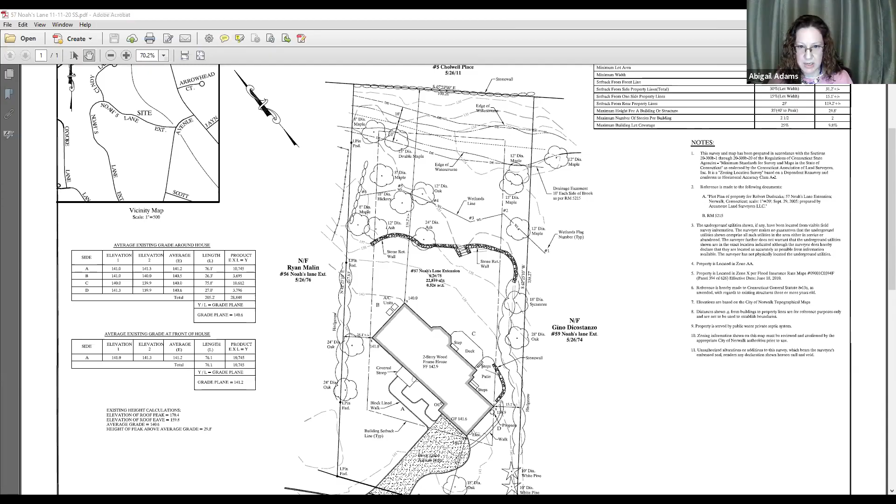I'm going to stop sharing for a second and pull up the design plans. Did that pop up for everybody? Okay, great. So I just want to quickly start with the demolition plan.

There's an existing walkway here, a small retaining wall, a patio, and an existing deck. Along with the existing retaining wall, we're looking to remove these items to make way for the new improvements we will be proposing. Let's go to the next sheet — here's the site plan of the improvements.

What we're looking to do is construct a new walkway around the side of the house to a new patio and outdoor kitchen area behind the garage, with a couple of steps down from the house and the garage itself. Then on this level, coming out from the kitchen, two steps down, one to a landing, and then another step down to a raised masonry patio that would have a seat wall surrounding it, and then a couple of steps down to a lower patio with a fire pit.

And this patio would be on level with the lawn. As you can see, we're looking to expand the lawn. In order to do so, instead of a hard masonry wall which might have large footings, we'd like to do some minor excavation in this area and install a large boulder wall.

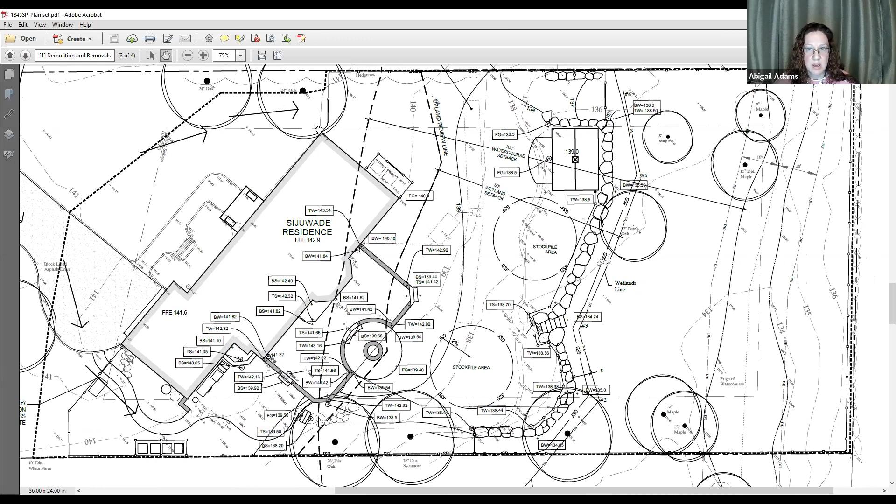And then wanted to move on to the wetland enhancement. As part of this development, we'd really like to significantly enhance the wetlands. In doing so, we'd be looking to remove some of the invasives and then do a planted buffer between the boulder slope and the wetland edge.

And then between the stepping stone path and the brook itself, we'd like to heavily plant that with natives. We're looking at northern bayberry, blueberry bushes, sedges, blue flag iris, cinnamon fern, shadblow, and eastern redbud.

So we're really trying to do a very diverse mix of plant material that's going to create an enhanced habitat and food source for wildlife, as well as four-season interest for the homeowners, and keep any of those invasives from coming back in. We'd really like to get those out and enhance this piece of property as part of the overall development.

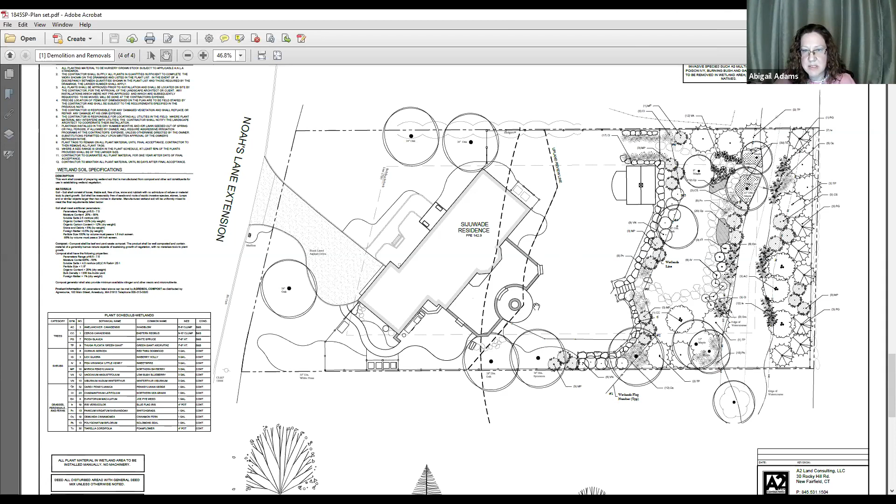One thing I did forget to mention—as part of the development we're looking to install a new septic system. Let me go back to the grading plan. The existing septic system and tanks are in this general area, and that doesn't work with any concept we were coming up with to get a patio that wasn't just sitting right behind their garage. We really wanted to utilize the back of the house and the kitchen, exiting there with a view of the whole property.

So we are proposing a new septic system, which has been designed by Palladino and Sons, and I believe they've submitted it to the health department for approval.

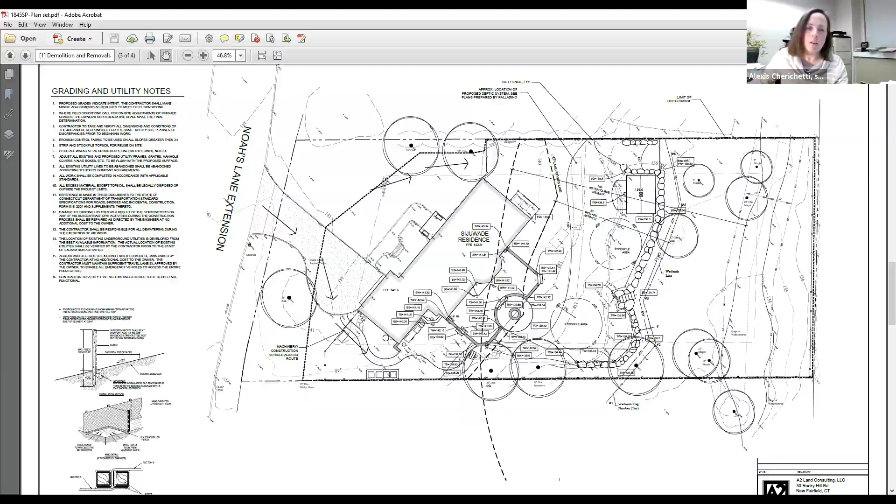Commissioners, questions? I have a question. I'd like to know if you can describe the fence again. You said a fence gets constructed around the entire perimeter of the property.

I'm confused. Yes, I shouldn't have said the entire perimeter. We'd be coming off the two front corners of the house, then the side yards, and then around the back of the property to enclose it. Would the fencing cross the brook? Yes, I'm proposing to raise the bottom elevation of that fence by about a foot or so to allow the flow.

Describe the fence again. What kind of fence is it? A board fence, 7 foot high. So like a stockade fence? Stockade, yep. Okay, thank you.

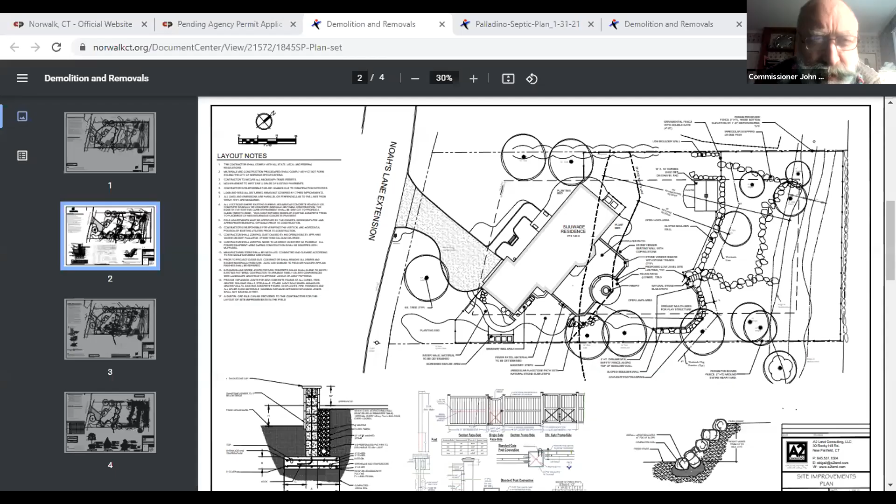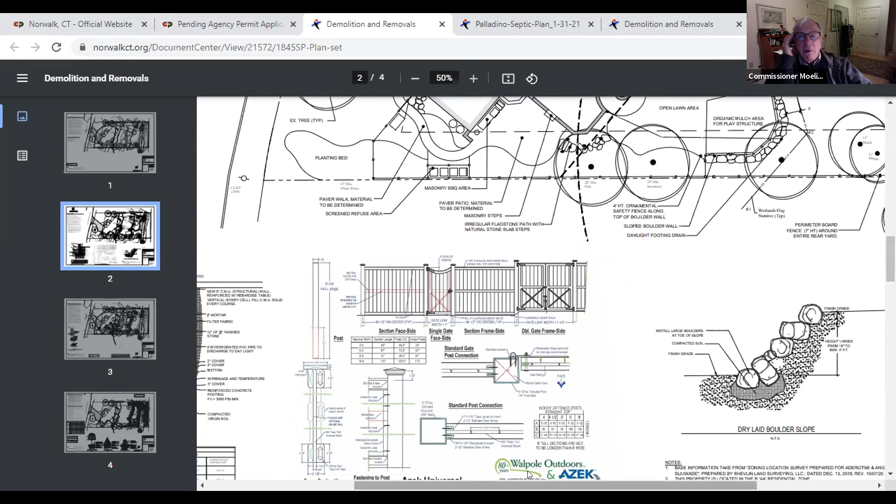So John, on sheet 3 or 2... 4, there's a detail of the fence, can you see that? Yes. And to the left are the footings that would be installed in the wetlands for the fence, is that correct, on the left-hand side? No, that's not for the fence, that's for the seat wall for the patio.

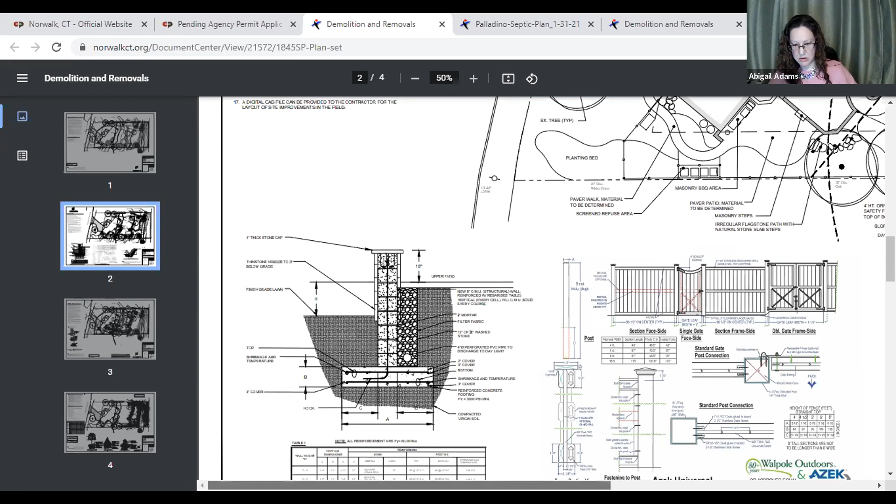The fence posts would just be dug deep, no cement, hand dug, set about 3.5 feet down into the ground. In concrete? No. And the fence is shown with the line dot markings around the perimeter. Thank you.

Abigail, in your presentation you mentioned a proposed application. This is an actual application, is it not? Yeah, that's just misuse of the term, our proposed development as part of this application. Okay, got it.

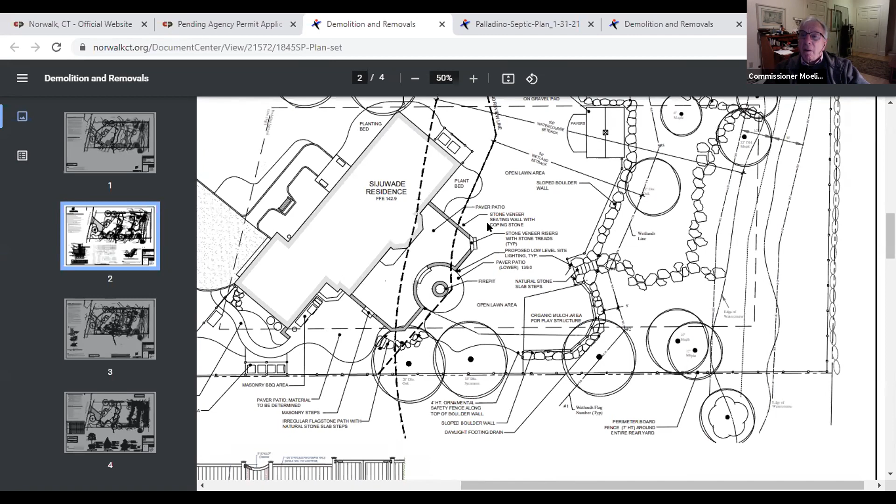I for one would be interested in seeing the current condition of the wetlands, so it would be easier to see the effect of the changes, enhancements and plantings. That might be accomplished by simple photography, I don't know, but I'm uncomfortable enhancing something when I don't know what condition it's in, especially with a running creek. I'd like to know if the level of that wetlands or creek rises regularly. I'd like a clearer understanding of what's there. I'm less concerned with the positioning of the septic tank and that sort of thing.

Okay, yeah, it's tough with the snow cover currently, it's a little hard to see at the moment. I can share some aerial photos real quickly if you like. I have copies, or at least one copy, of what was called Figure 1.

Can you describe that wetlands, Alexis? Have you seen it before it got snow covered? I have not seen it since the application was submitted. I went out there a long time ago, either in 2013 or 2015, when the current owners were considering the purchase, if I remember right. So unfortunately I don't have a good feel for the current condition of the wetland. It's not much higher in elevation than the watercourse.

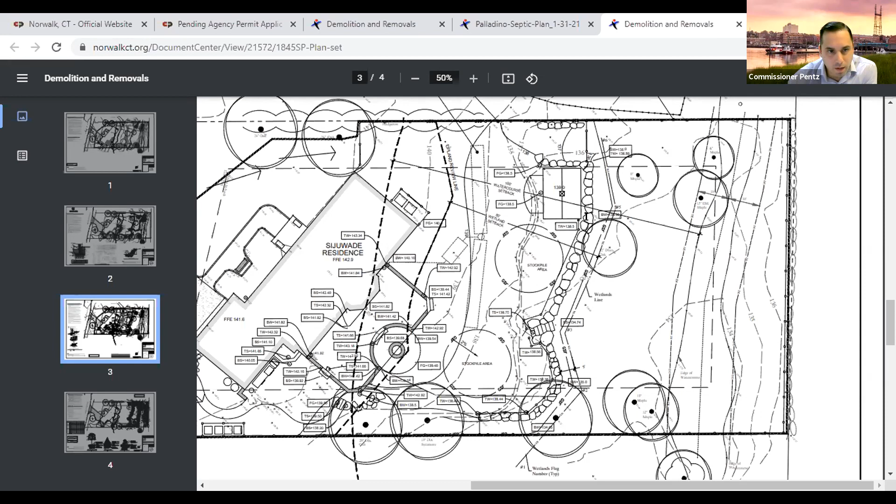The minimum distance is 5 feet from the wetland edge to the toe of the boulder wall, and then it would move back, so the excavation would be happening from the upland area. We do some excavation, just a little bit, because we'd set the boulders and then we'd be backfilling against it. So there's actually minimal excavation work that would need to happen either.

We'd set very large boulders to hold that slope back, so we don't need to have a large footing or any concrete poured in that area. The truck would come, it would set the boulders down and move along in a line and then back away from it and backfill. So there would be no disturbance within that wetland.

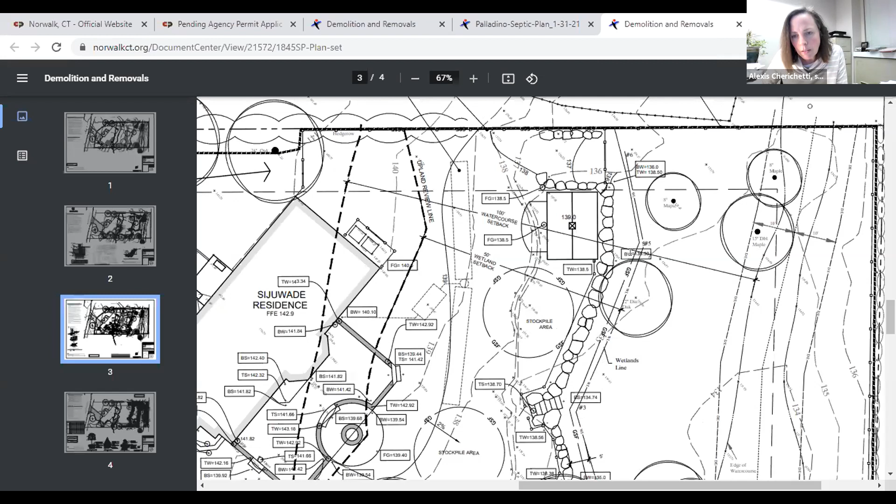So right now your silt fence line, the limit of disturbance, runs pretty much parallel to the wetland line, right? So this is the wetland line, and then what's labeled GSF is your silt fence line? Correct, which could be shifted away from the wetlands if need be.

Can I ask a question? How much fill is going to be brought in? Yeah, good question. We've calculated approximately 125 cubic yards.

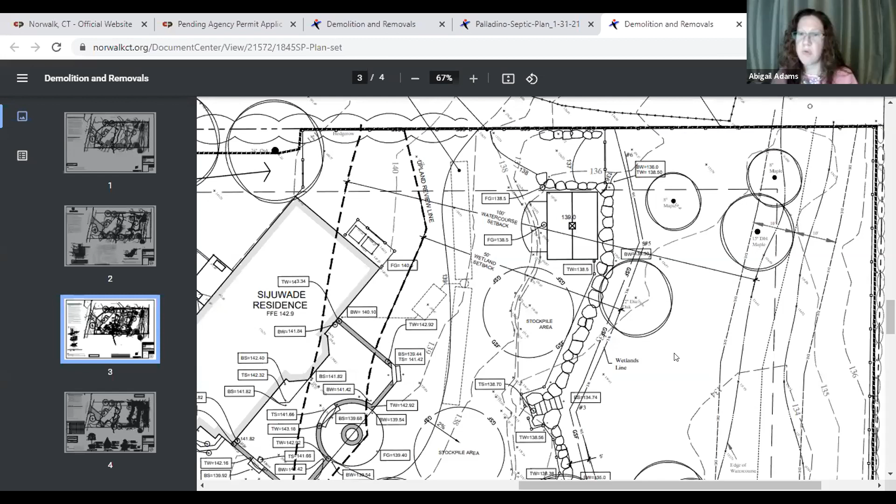That includes the fill related to the septic system as well? Correct, that's everything related to that expansion and for the septic system.

Is this a gate? Yes, that would be the rail, again, the railing style fence would come across there into the boulder slope down at the lower level so that there could be maintenance. I mean, there are some ashes in that wetlands area, but if there ever needed to be any kind of maintenance, we would want to have a gate back there.

I don't anticipate it being used very often, but again, the railing and that gate, it's a safety issue. So we have the railing across the top of the boulder slope. It would dead end into the shed, and then it would pick up again just where you had shown it at the base of that boulder slope and come across and meet up with the 7-foot board fence.

The top portion of this schematic is north, am I correct? Yes. Okay, the length of the fence that is anticipated to run across the wetlands from the midpoint to the edge of the property would be how long roughly?

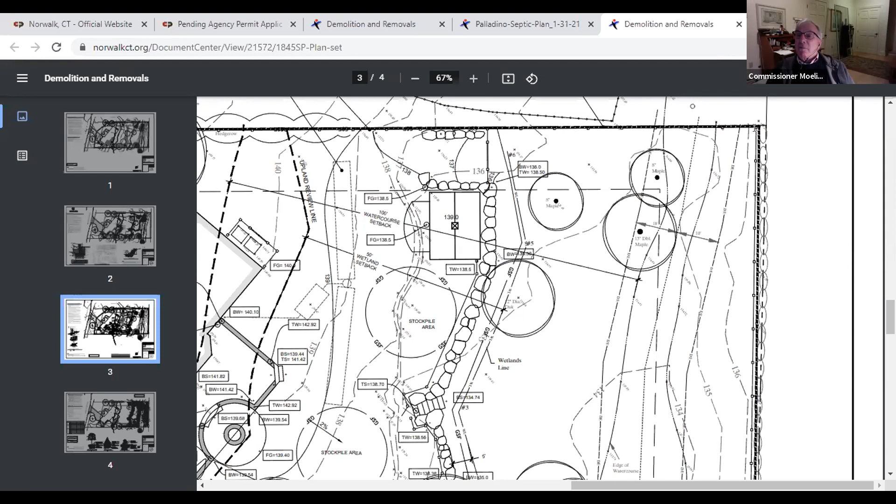Would there be one every 8 feet, or every 6, or 10? We'd probably do every 6 with the height. So you do every 6 feet for 60 feet, so it'd be 10 uprights running through the wetlands area.

On that northern part of the property, on that one side? Right, and then we have the southern side as well, which is about 75 feet.

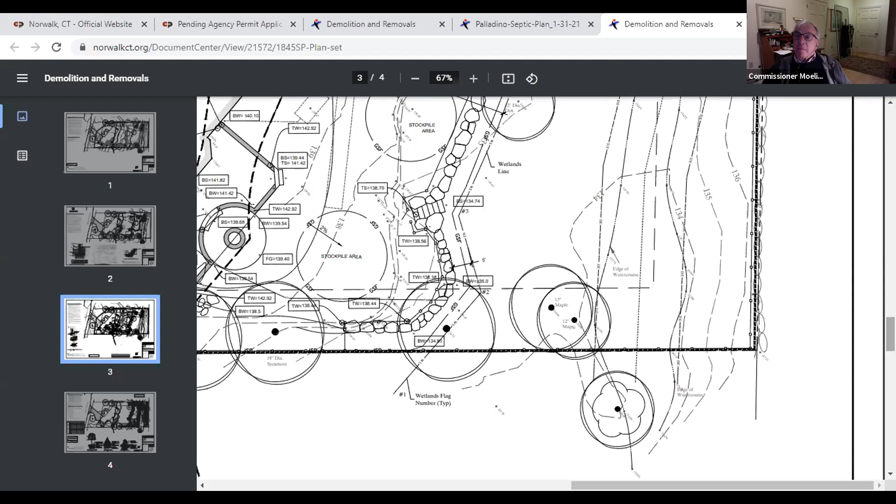That's a lot of disruption. On the east side, it's obscured by the thumbnails of our faces on the right-hand side. Let me get rid of those. That's 100 linear feet, just so we're clear, because that's the back.

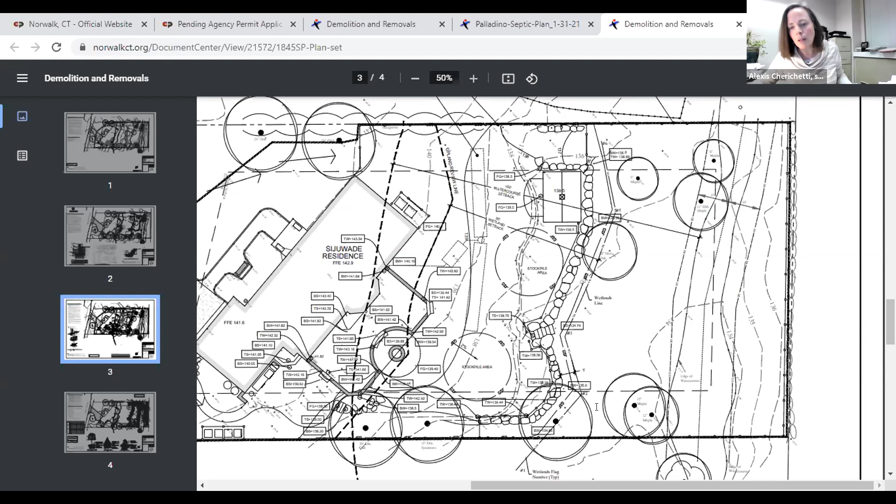But I can't tell whether the length of fence connecting the northern piece with the southern piece runs through the wetlands. Yes. So this is the wetland line, all of this area is wetland, and this is the water course where my cursor is now. The northern and southern portions would cross the wetland and water course, then run down the east side of the water course within the wetlands for approximately 100 feet.

Correct, at the top of the slope there. And the construction of the fence would be the same throughout. Yes. Okay, thank you. You're welcome.

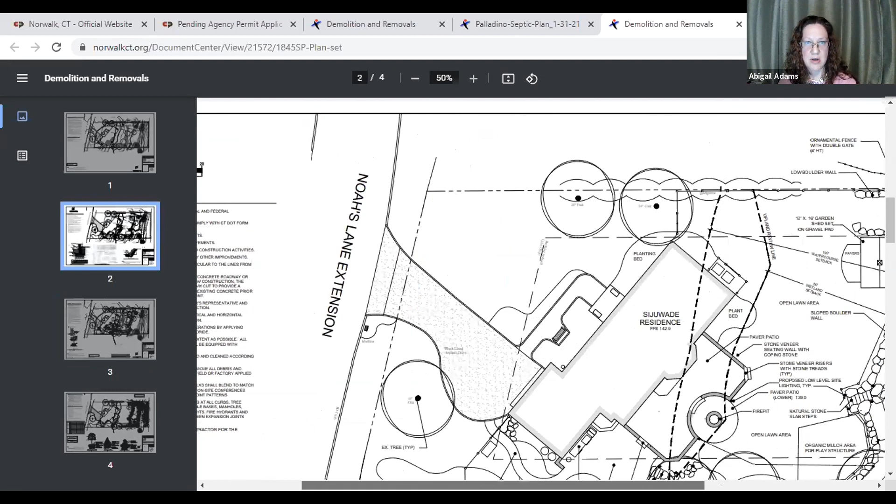Can I ask a question? Yes. I'm curious about this fence going in, and in relation to wildlife, will wildlife be able to access that water, or will they be fenced out completely? So again, the intention is to raise the bottom elevation of the fence over the water course section so that typical animals, fox, raccoons, things like that, would still find their way under it, so you could still have migration across the property. It would keep deer out.

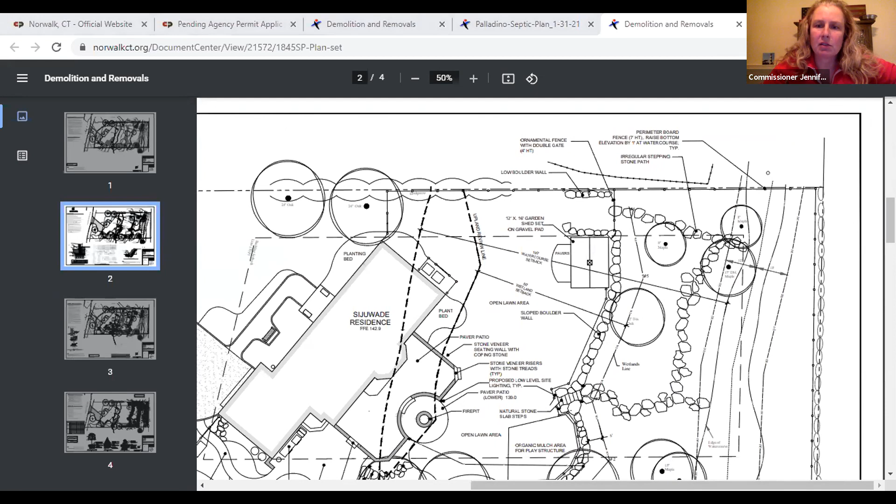Okay, well, deer can jump 8 feet, but I don't know if they'd necessarily jump this 7-foot fence. And are there houses beyond the waterways? Is that why the homeowners want the fence on the back? Is there a way they can just do the northern side and the southern side and stop before the wetlands so they're not disturbing that?

Yeah, maybe I can jump in. The fence is really a matter of privacy and security for us. There's that stone wall across the back—it's literally our neighbors, and even when we're in our living rooms we sometimes want to close the shades because it's like direct access.

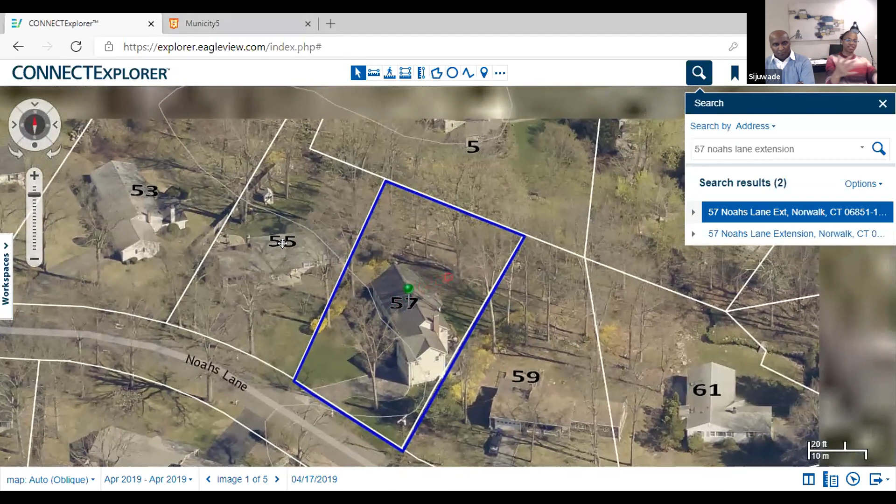Well, it's the side of their house, it's like directly into our house. We've actually had a couple of occasions with people on our property. One person was taking photos of our house—they'd come over from the neighbor's side and we don't know why or what that was about. Another person came through. So that's part of the real reason we've been looking at fence options with Abigail, to try to get a sense of things, because we do have two little girls.

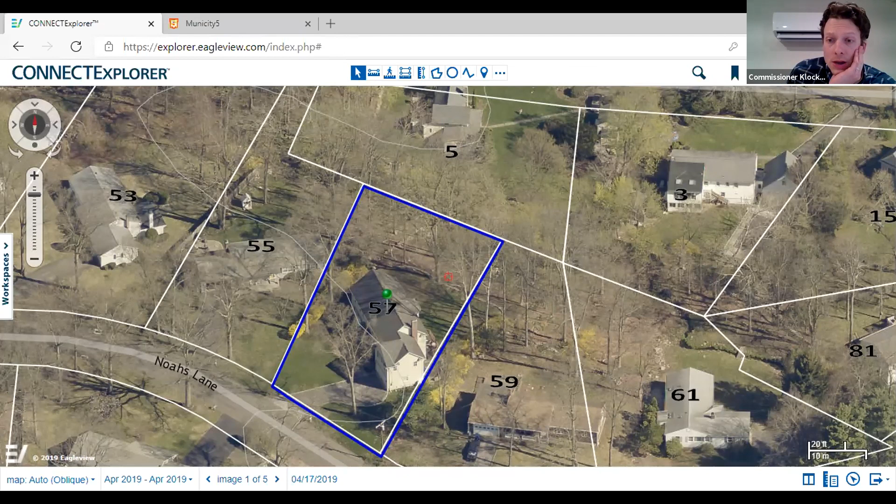Okay. So if we're wrapping this up, I think Abigail and the homeowners are starting to get the drift that our purpose here is to make sure the natural and indigenous character of the wetland is not disturbed. So if you were interested in reconsidering a few things, especially the ones mentioned in the past few minutes, before we see this again in a couple of weeks for a more in-depth discussion, you may want to consider that.

I'm assuming Alexis told you some of this, but the wetland acts as a buffer between land and water, and the water connects everybody. So unfortunately we've got to find a balance between your rights as a property owner and what you have the right to do on your property, and how that may affect the rest of us. Just a couple things to keep in mind as you're considering whether to make adjustments to the proposal.

Thank you. Any other questions, commissioners? Well, it will stay on the agenda until there's a decision made, and this commission won't rush to a decision that you don't want. So they will definitely work towards finding a positive outcome.

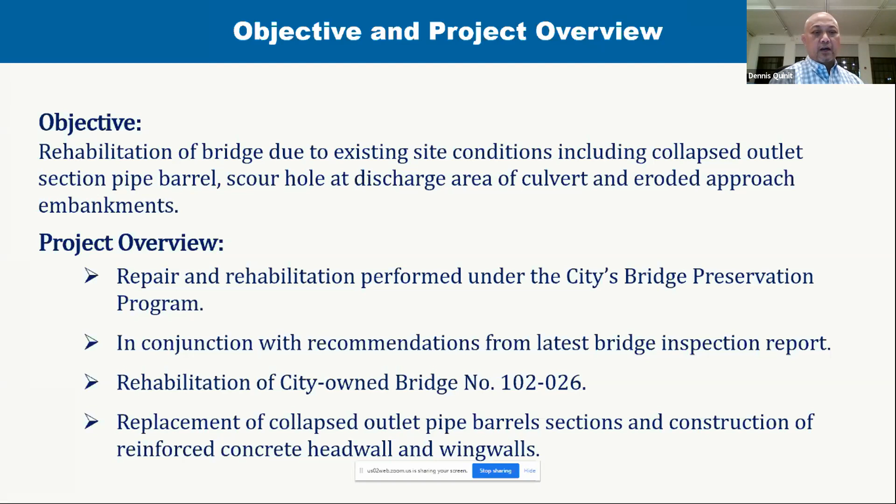Next slide. So basically, this is a culvert that conveys the Holy Ghost Father's Brook. It's about half a mile from Richards Avenue, east or west of it - I forgot the exact street. Anyways, it consists of 4 reinforced concrete pipes, about 30 inches I believe. Next slide.

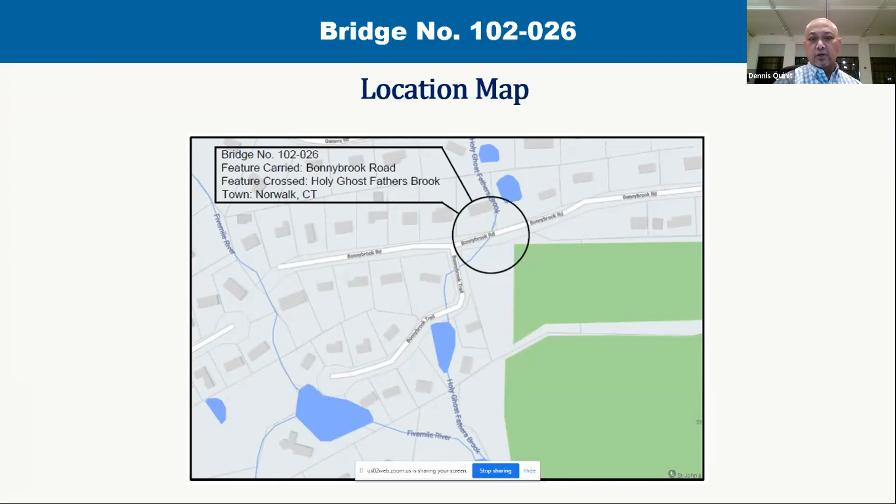The existing structure was built sometime in the 1960s, and it's essentially a buried structure with bituminous concrete pavement and grouted stone masonry head walls. The existing condition right now, the end or discharge section of the pipe has collapsed, basically undermined by the scour hole that developed in the discharge area. The scour hole was deep enough that it essentially undermined the stone masonry end block, which caused the collapse of the structure. The adjacent embankment has also eroded, which led to the undermining of the chain link fence.

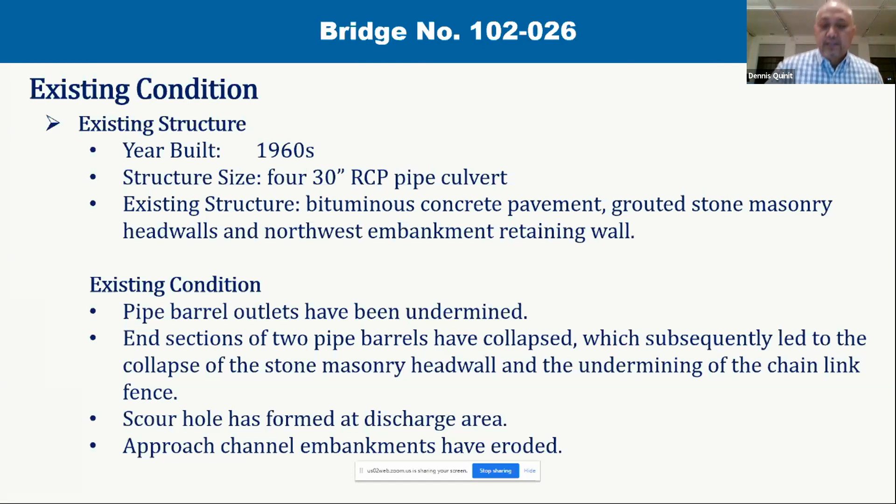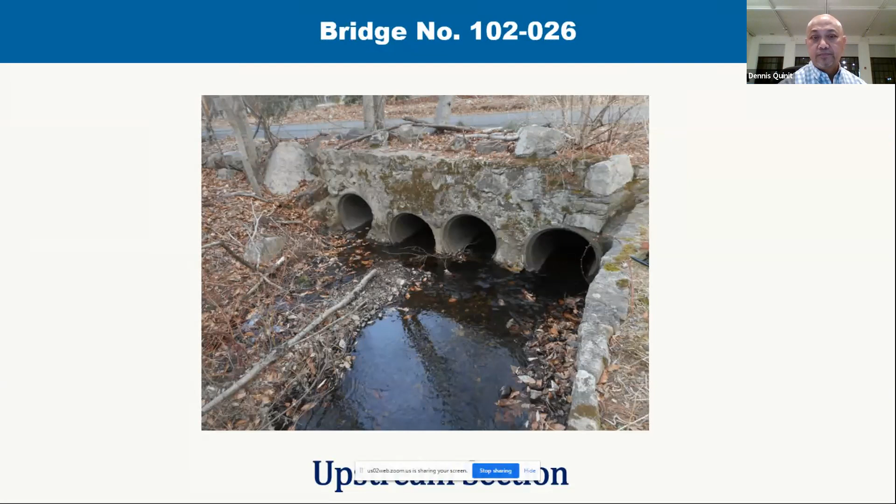Do you consider this to be in good shape, the upper side? That slide, do you consider that to be in good condition? There are some deficiencies that we've observed there - basically loss of fill between the pipes, which we propose backfilling with a flowable fill. Okay, next slide.

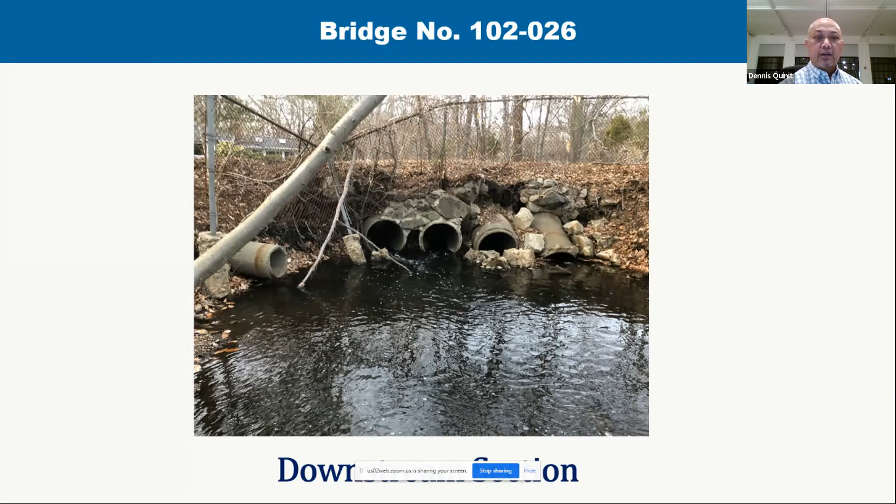This section actually is the downstream section. As you can see, the 4 end sections of the reinforced concrete pipes have collapsed into the channel itself. The stone masonry end block also collapsed into the culvert because it was undermined by the scour hole. To the side of that, the embankment was also eroded, which led to the undermining of the chain link fence.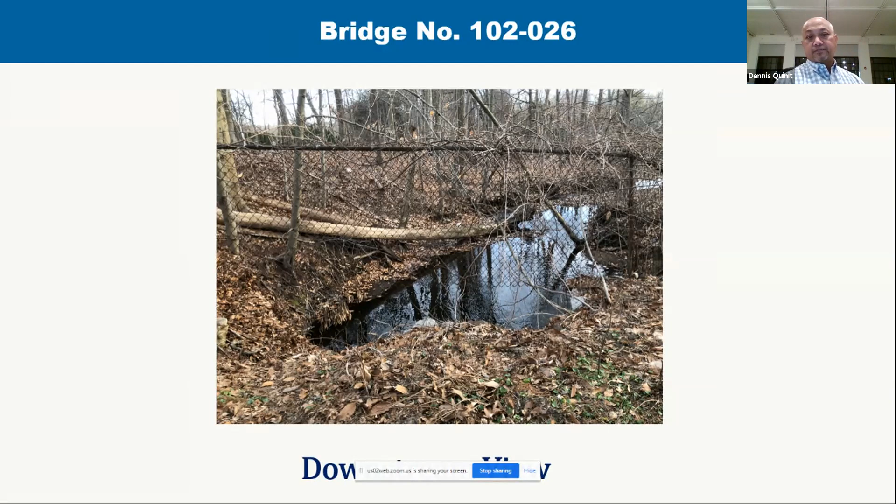This area right here is essentially the snow shelf, which will be regraded once we have repaired this area. Next slide.

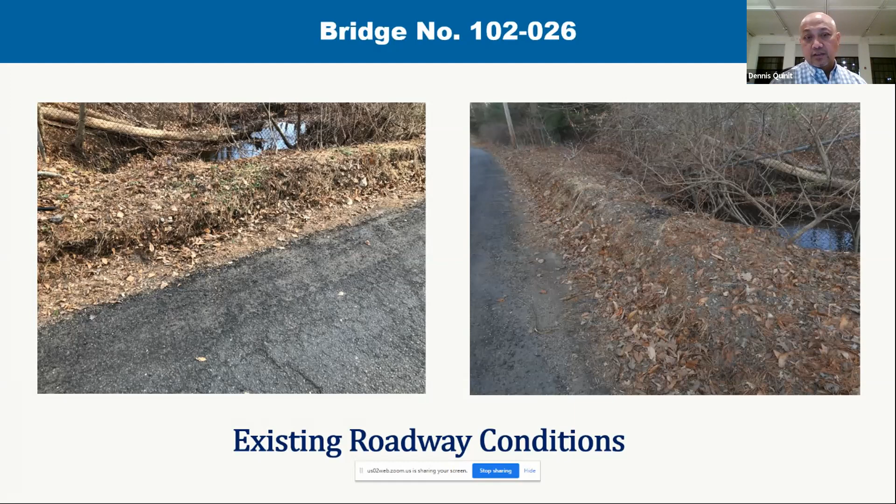Again, this is a picture to your left. There is the east embankment. As you can see there, the channel embankment is now pretty steep, and this one here is probably eroded by as much as maybe at least 5 feet. So we're proposing regrading this area as well. To the right of that picture is another image of the collapsed end sections of the culvert.

When you say regrading, are you talking about bringing in fill to replace that which has been eroded? Yes, and we will show that in our preliminary design plans. You'll get a better image of that when we show it in the next slides. Thank you.

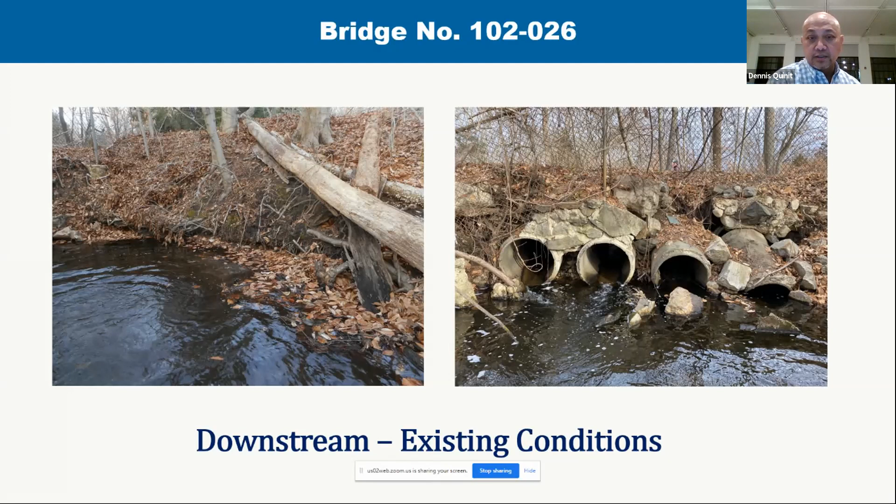Next slide. Again, this shows different angles of the deterioration. To the left of that picture there is a storm drainage pipe that we plan on relocating because it'll be in conflict with our proposed wing wall. So we'll be relocating that as well.

As you can see here, the embankment has been eroded, and it basically undermined and exposed the foundation of the chain link fence. We will be replacing the chain link fence as well. Next slide.

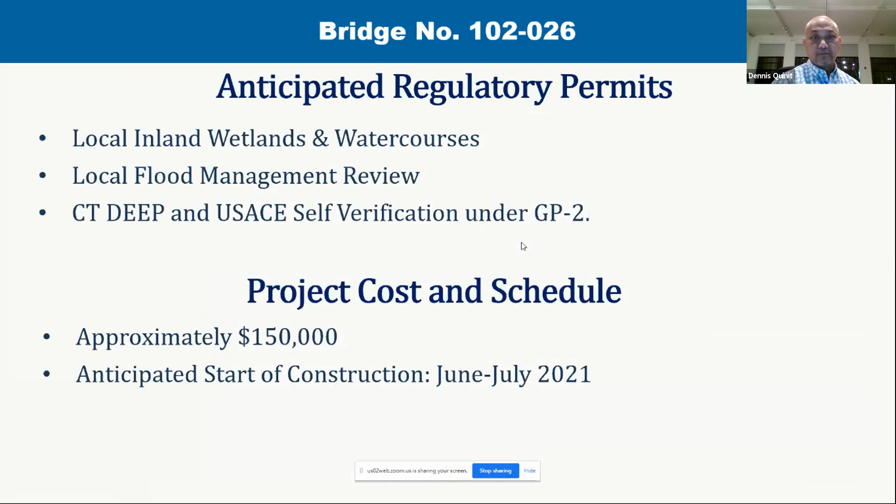I don't think we need to go through this slide. Next slide. That's it, so that's our presentation. Thank you for allowing us to present our project.

We're open to questions, and if we don't have the answer, we'll try to get that to you. Commissioners, anyone? Yeah, I have a question.

What's the purpose of the chain link fence? The chain link fence, I believe, was mostly for pedestrian safety. It is also, I believe, the delineation between the right-of-way line. South of that is owned by, I believe, the cemetery. So I think it's just a property delineation for that property, and also for pedestrian safety, because there's a drop off there. For the most part, it's probably just to prevent people from trespassing, and again, for pedestrian safety.

Okay, is there a safety requirement for it? OSHA will always require something whenever you have a drop off of about two feet or greater. And so in this case, it is appropriate. And even if we don't need a chain link fence there, that chain link fence might have been installed by the property owners south of the structure.

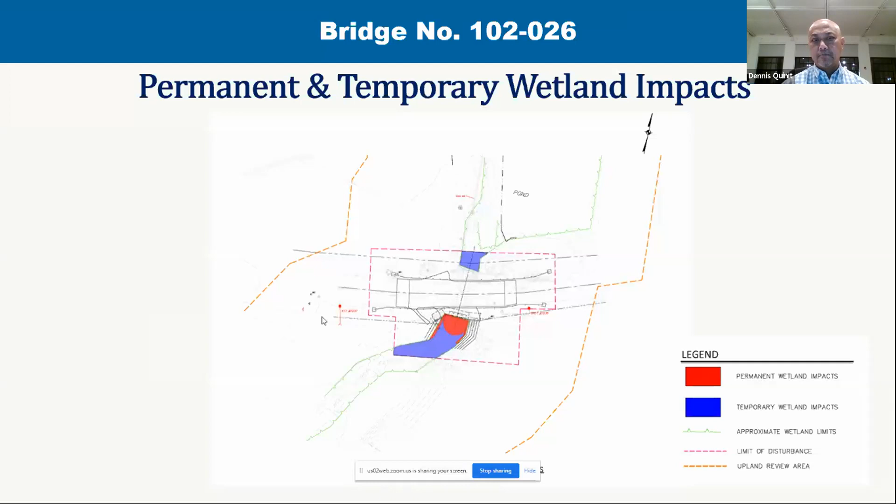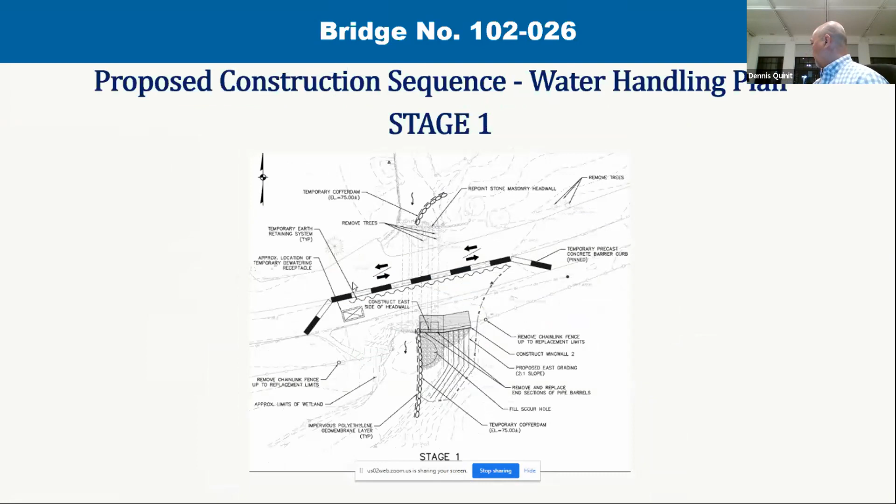Anyone else? How many trees are being removed for this? That's a good question. Luis, if you could go back to the slide showing the embankment and the... what do you call this? No, maybe the pictures, maybe. Further up in the slide. More, go to the pictures, go to the images.

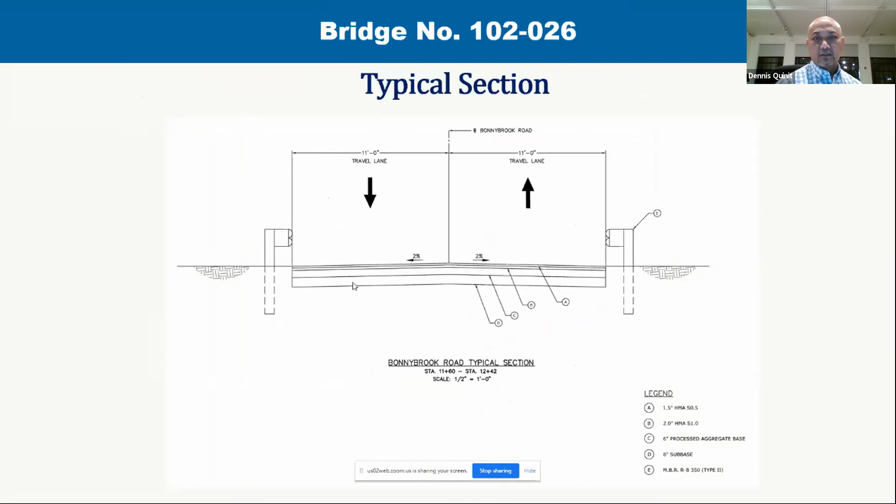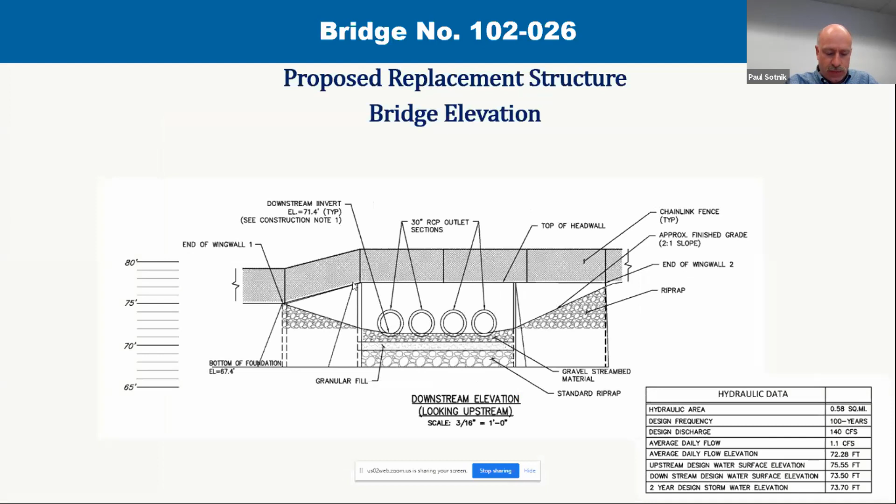While Dennis is getting the information, Commissioner Levin, I can answer one of your questions since I grabbed the actual numbers. Out of the 26 bridges, the ones in the 1 to 2 year category for assessments, needing rehab within the first 1 to 2 years, there were 14 of the 26.

This general plan identifies some of the trees we are proposing to remove. For the most part, we are removing this to improve vision and also to prevent potential disruption of the culvert from tree roots.

To the north of the culvert there's a snow shelf with a bunch of trees, and we're proposing clearing that area and regrading it. Just to the east, we're removing some trees to install the guide rail. There are also trees in the discharge area that might need removal because they're in the way of the wing wall construction and embankment regrading.

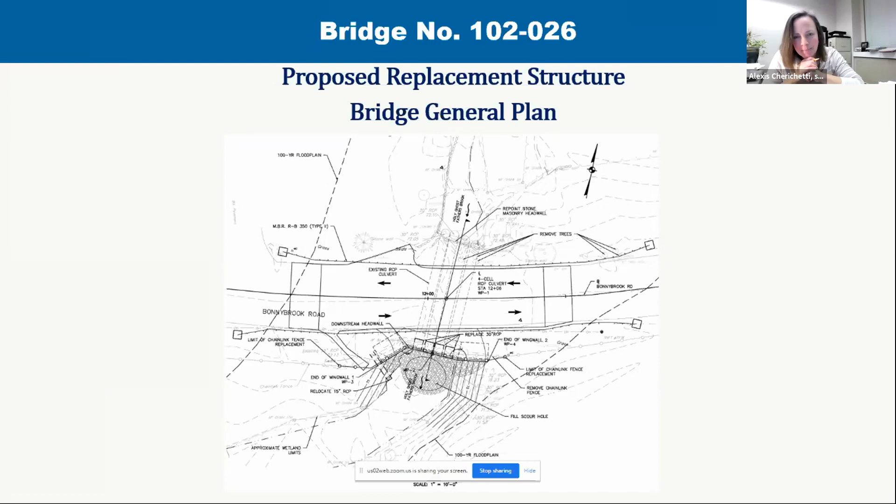Moving along to S21-565, 8 Shadow Lane, Gracia, installation of an in-ground pool and retaining wall adjacent to a wetland and watercourse.

Alexis explained that some might recall this property was before the commission previously for corrective action work, and there was a request to install a retaining wall that the commission said would not be part of the corrective action plan, asking the applicant to come back with a plan that includes the wall. The applicant is back to do that.

So let me just share. You want me to share my screen? I think the applicant's here. Yeah, I've got my screen as well, Alexis. Okay, you can go ahead and share yours if you like, whatever you prefer. Okay great, I've got some highlights on mine that might be easier to read.

Good evening everyone, for the record, Kate Throckmorton, licensed landscape architect with Environmental Land Solutions. As Alexis said, this is a property that was redeveloped. There was an existing old dilapidated house that received a permit in 2018 to be reconstructed, and there was a minor violation that was resolved last year.

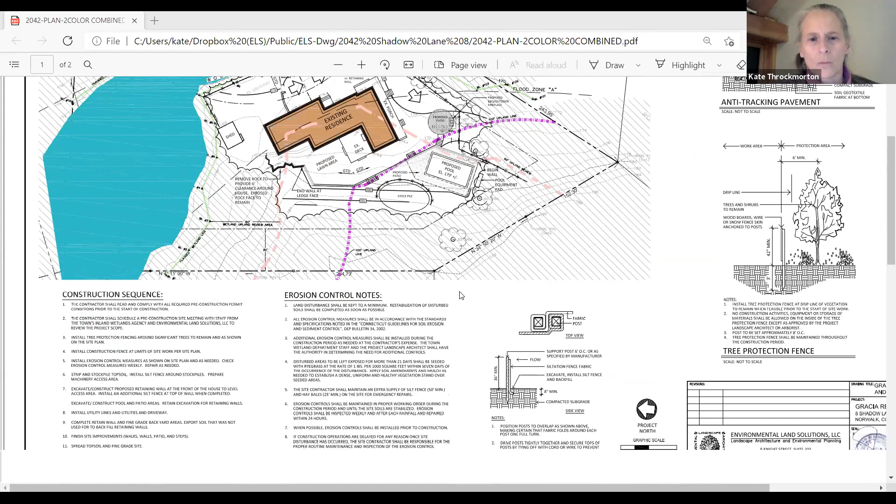I'm going to just scroll down and give you some idea when this plan is finished. We will be reinforcing the existing lawn areas with additional planting. These trees will be replaced in the front. A row of arborvitae along this area for privacy, and again, reinforcing that existing lawn edge.

And then in the front, the drive is actually going to get reconfigured and reduced to make sure that it complies with the zoning regulation. And there'll again be native plantings to reinforce that edge and to prevent creep into the wetland areas.

So that's kind of a brief overview. The intent for the pool is to balance the cuts and fills to reduce any earthwork coming on and off the site. Certainly it's going to be a challenging job. So if we use smaller material and reduce the need to bring on and off fill, I think that will help make the whole process go a little bit easier.

So I'm here for questions. That's a very quick overview. I'm happy to listen to any comments that you have.

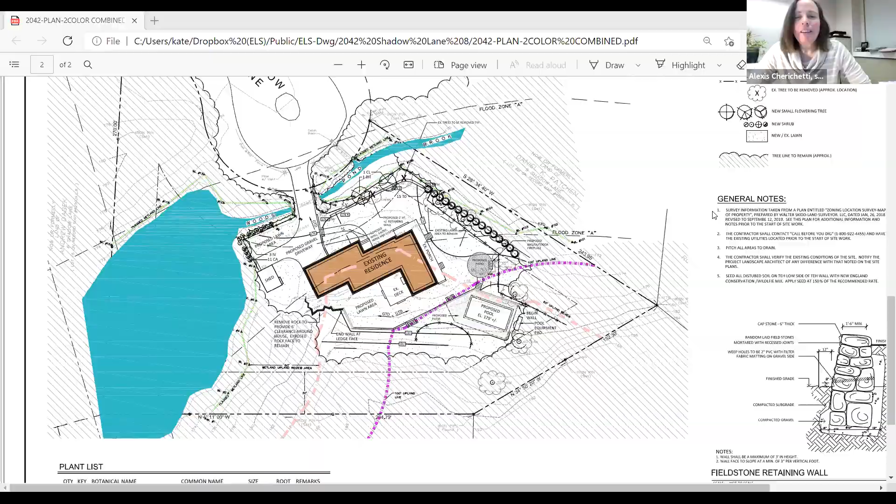I would encourage a little bit more of a robust planting adjacent to the water course. That's my suggestion. At this point, there's an extremely narrow buffer between the active residential area and the wetland and water course. And I'd say that we're removing the driveway on the south, which provides some opportunity instead of lawn so proximal to the wetland.

Are we worried about the 2-foot retaining wall limiting the ability of the creek to expand and contract as necessary? There is a flood zone associated with this brook, but the retaining wall, I believe, is outside of that flood zone, but I'll double check.

Kate, is this the north end of Woods Pond Creek, right? Yes, Woods Pond Brook. Woods Pond Brook feeds into Woods Pond in the north. Is that correct? It's certainly not, it's actually the lower end. It flows from the left side of the property to the right. So I'll clarify exactly where that ends up.

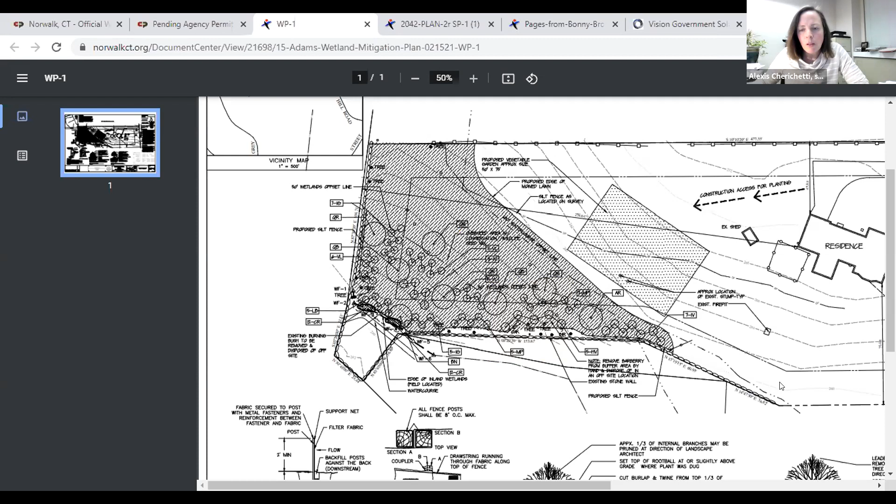So in this map, the hatched area is proposed to be maintained as a meadow to be mowed once per year. The upland review area limit is this line here, so pretty much 100 feet of protection for the wetland and water course that's kind of in this location here. Sorry about all the stickies popping up.

So that's kind of what I had. I had asked the applicant if they were willing to do some kind of demarcation for the line between the proposed lawn and meadow. In my experience doing compliance inspections, a meadow line is easily transient without some kind of physical reminder of its location. I did do a staff report that included some possible conditions for you commissioners to consider.

Is that on the site? I don't remember seeing it.

I was checking Lex's email. I think it was an email. I don't see it uploaded to the site.

I'd like to respond to a couple of things. Mr. Chalifo, if you just say your name for the record. This is James Dean. Tracy Chalifo is the licensed architect, landscape architect, and she's with us tonight.

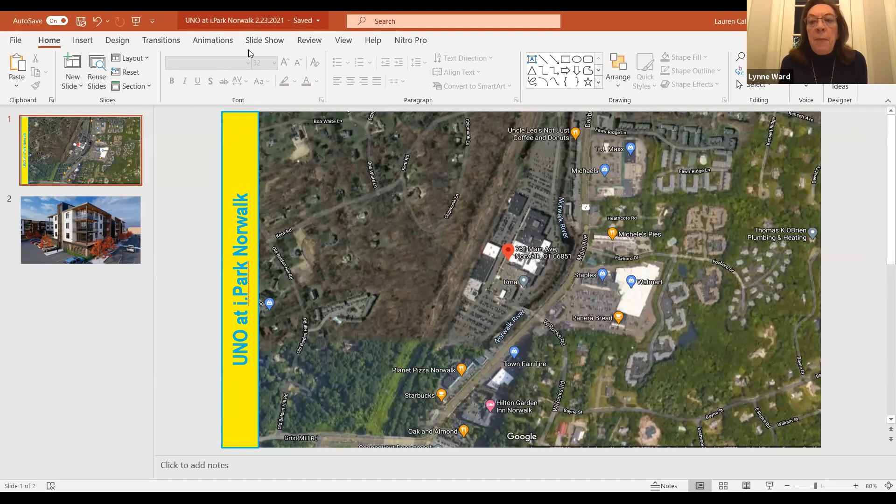Should I continue? Yes. The only other thing I'd like to say is there seems to be a little bit of a disconnect, because in a letter on February 12th, we did respond to all of the DPW's questions. So I think we're all one step disconnected, but I'll leave that to Alexis, because I believe she understands precisely where we are. At this stage I won't describe the project further since it's late and everyone's familiar with it. We think it's a very exciting development, and we hope to be earlier on an agenda sometime so we can convey that while everybody's still fresh. I'm going to hand it over to Steve Pustola.

Thank you. Hi, I'm Steve Pustola, professional engineer. I'm here with Rick Holland, our chief designer. We also have with us Dave Hughes, civil engineer and licensed land surveyor. And John Mbimbo is here as well, doing the landscape architecture, along with Lauren, who is Lynne's most competent assistant.

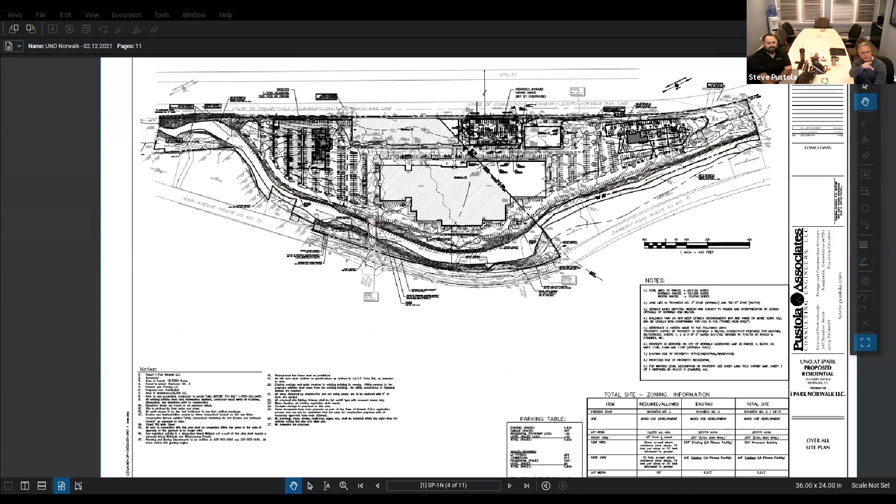Anyway, if you don't mind, can you share the screen? Are we shared? Okay, so this is the overview of the property. We're going to point to the LA Fitness there—that's what you see as you drive past on 761 Main Avenue. And to the south is the proposed building location. So what we'll do is switch to the next drawing.

So the hatched area, horizontal hatched area, is the outline of the footprint of the building. The building is an elevated structure on columns, and parking is underneath, which is what you're seeing right here. You're seeing through the building down into the parking on the ground, which is accessed right at grade.

Important feature here is that we try to keep the grading of the existing parking lot as close to where it is as possible. So the footprint itself is a 50,000 square foot footprint, but the actual pieces of the building that are touching the ground are those darker hatched areas, and they are about 7,500 square feet.

This building is proposed within the floodplain. It's an AE zone. We're not doing any grading in the floodway. We've stayed completely out of the floodway, and we're just in the floodplain area.

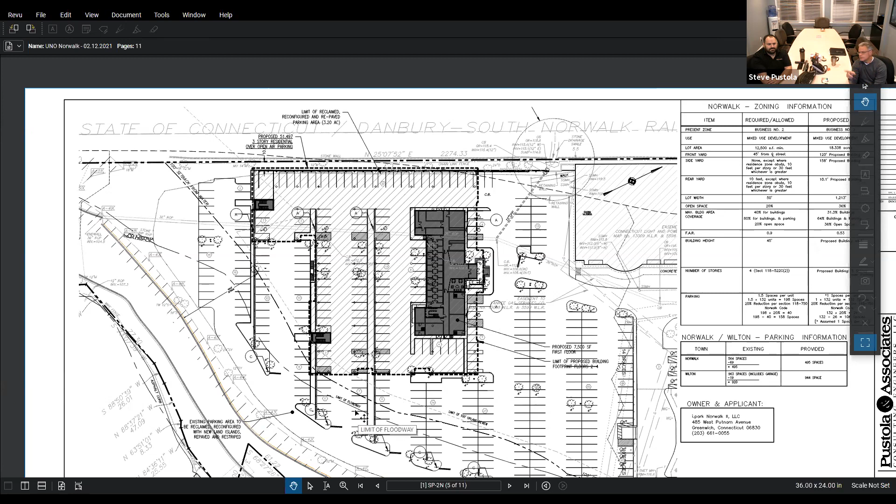So part of building in a floodplain zone is following FEMA's best management practices, and some of the things we've included here are protecting the floodway, so we don't have any grading, any changes in grade in the floodway.

We've elevated the structure on piers, as I mentioned. We are also maintaining as much of the existing parking lot grading as possible. And we're providing compensation for those areas that we are filling, the darker areas there, to the south, right in there. So we have about a 1.8 to 1 ratio.

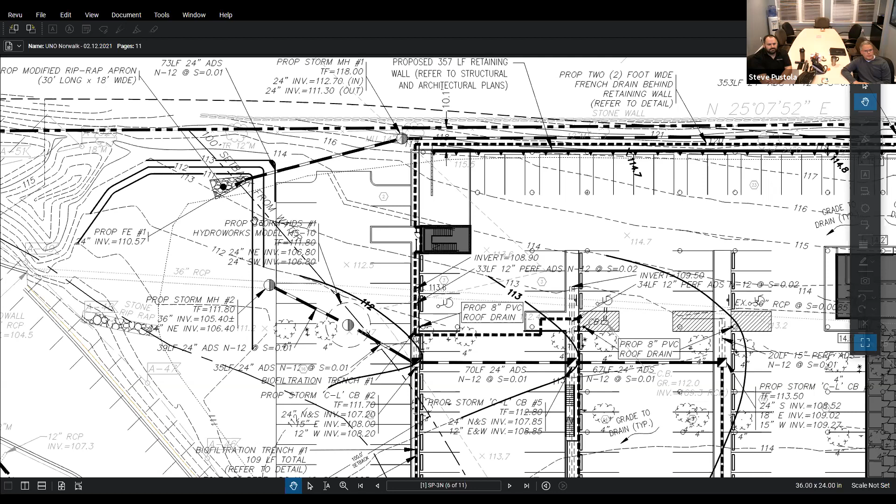So we're filling, we're overcompensating by almost a 2 to 1 ratio.

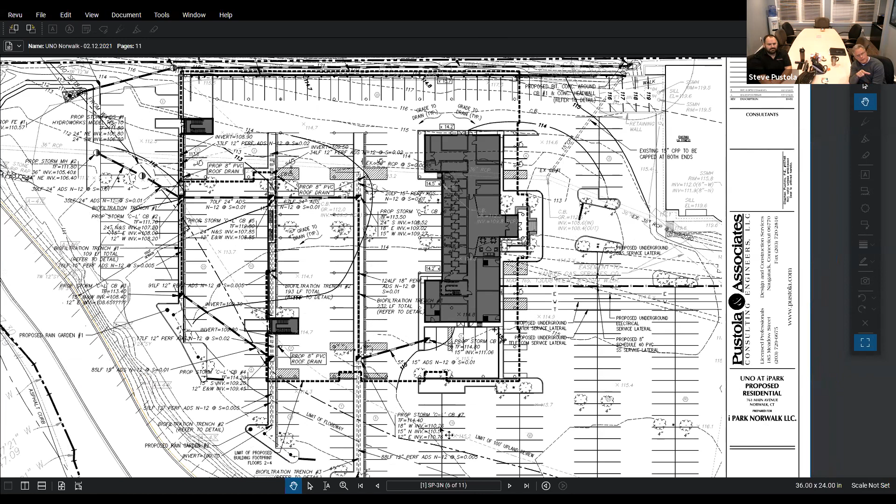Additionally, for stormwater management, we're improving the water quality of the stormwater by adding biofiltration trenches. Now, we originally spoke about this as being limited to just under the building, but as we further looked into this, we are expanding those biofiltration trenches along the entrance islands that are currently existing along the property here.

In addition to doing that, we're also enhancing the buffer zone between the river and the site on the bank of the river. So what I'd like to do is flip now to John Imbiano there to show you the planting schemes within the biofiltration trenches and another area.

Excuse the interruption, but did I hear you say you were going to enhance the buffer zone? Yes, sir. I was going to flip it over to John Imbiano there, our landscape architect, to show you what he has in terms of plantings. Thank you. You're welcome.

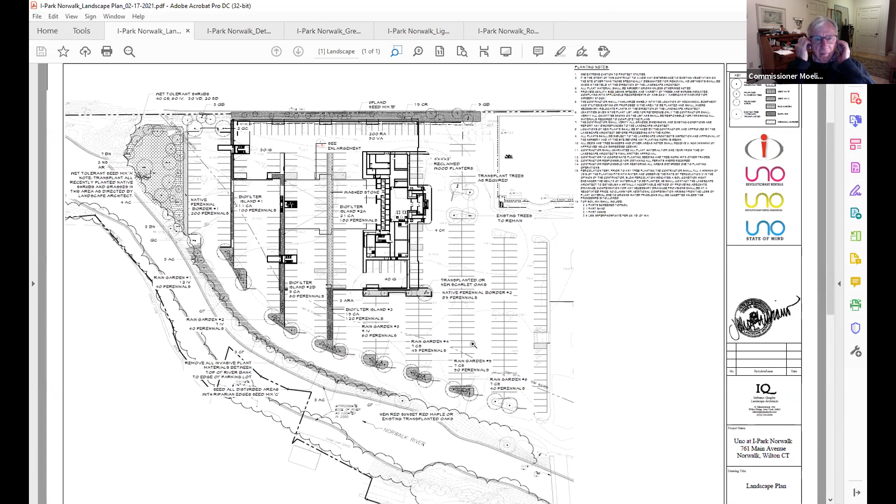He's muted. John, you're muted. Yeah, I think so. Can you hear me now? Yes, sir.

Thank you, sorry. I'm John Imbiano, a principal with IQ Landscape Architects in White Plains, New York. We've been working with National Resources on this property for many years now, and have been before your commission a while ago, but we have been before you. Next to me is Vanessa Ayala from my office, assisting me with the presentation here.

So as Steve mentioned, there's a couple areas I would like to focus on. One of them is the biofilters, which are the strips that the engineers have come up with to treat the water. And what we're able to do is implement in 95% of the cases, or the islands that are exposed to the exterior, the outdoors, integrate a planting strip of native, generally herbaceous material, but we've also incorporated some native shrubs, be it clethra or winterberry in those islands.

The species is recommended by one of the proprietary components of the biofilter system, and also from our knowledge of doing a considerable amount of bioretention basins and rain gardens throughout our career.

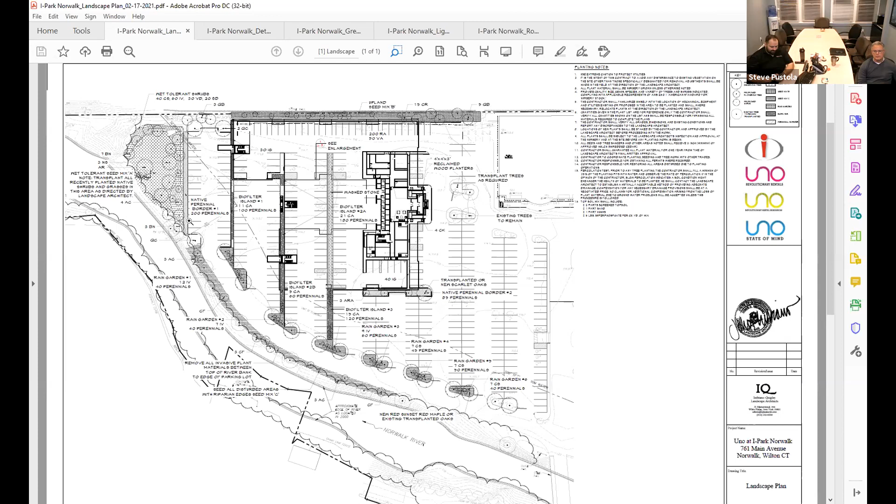Yeah Dave, do you have an idea? David, you're muted. Still muted, Dave. You need to unmute yourself. At least we'd have half a chance of seeing what you were saying because you didn't have the mask on, like John. Is this better? That is much better. Thanks, all right.

Mr. Chairman, members of the commission, David Hughes, professional engineer, registered land surveyor. That area is about a tenth of an acre, about 4,300 square feet, for the floodplain compensation.

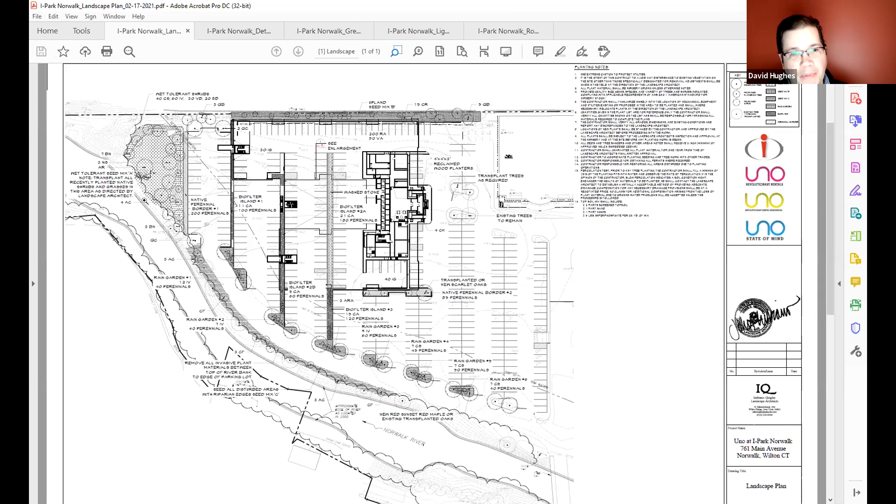Thank you. The last zone we're dealing with for restoration work is the buffer area between the river and the parking lot. There's an embankment we don't want to touch, with some vegetation on the slopes there. But from the top of the ridge or embankment to the edge of the parking lot, we'd like to remove all the invasives growing there, restore that area with a riparian buffer seed mix, and integrate close to a dozen or more smaller flowering native trees along there.

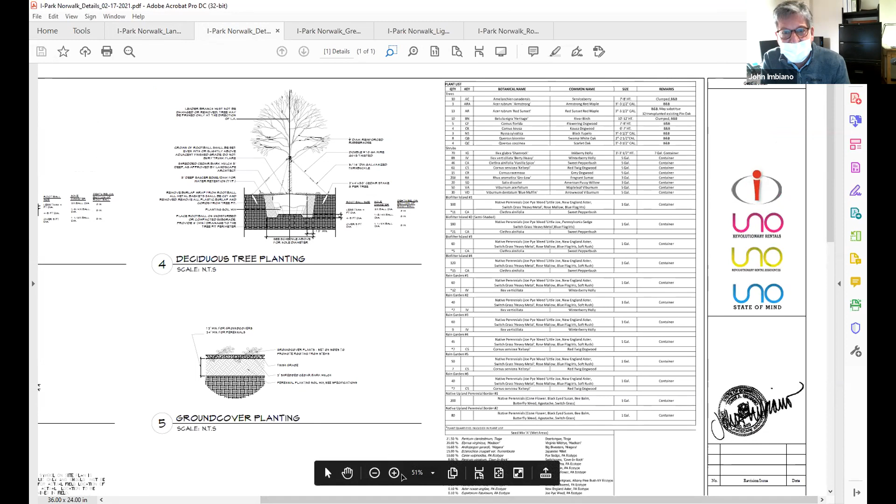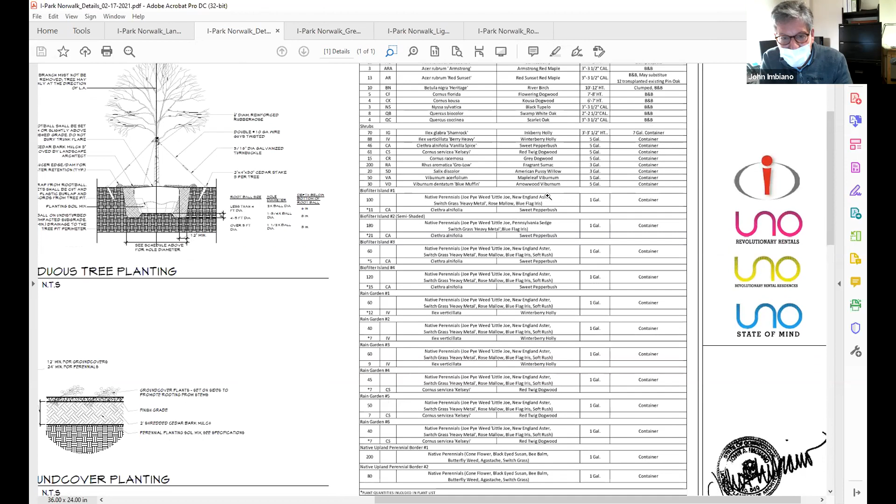We have a comprehensive plant list. We're replanting over 60 native trees - you can see the list if you'd like to go through them in detail - and over 500 native shrubs, including winterberry, clethra, red twig dogwood, fragrant sumac, and some viburnums that would do well in that flood mitigation area. The shrubs and trees would take some inundation as expected there too. The palette here is pretty well time-tested, and from my experience with bioretention areas, they'll take drought tolerance when there's no storm event, and they'll also take the inundation and treat the stormwater in those biofilter strips.

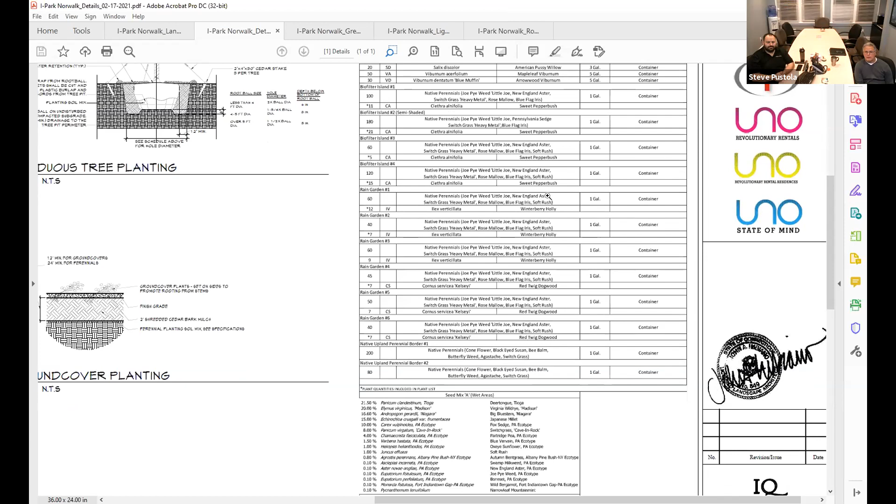So thank you. I don't know if I should hand it back to Steve, but I think that's basically a quick presentation to get a flavor of what we've been working on with the DPW. Commissioners, you're on.

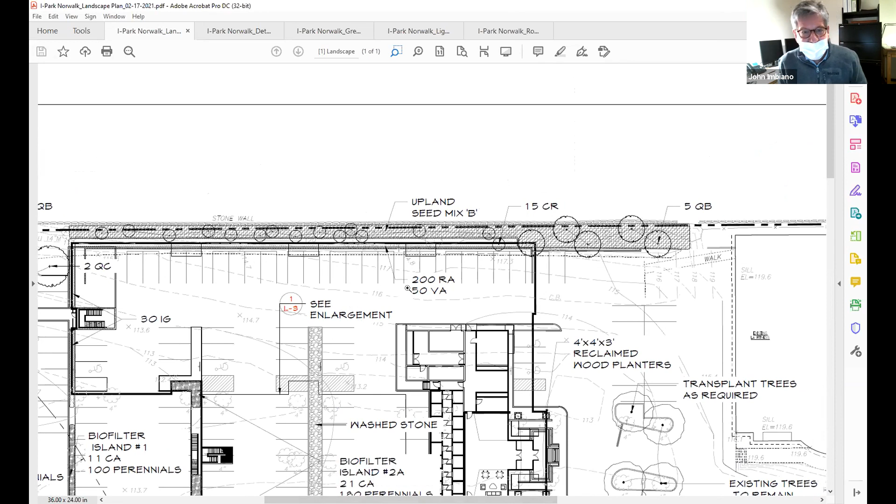I have a question. Is there planting going on the west side of the property? There is, between the building and the rail. Yes, that area would be restored with more or less drought-tolerant material, considering the slope there, and that it's very much an upland area with some bicolor oaks, some viburnums, and fragrant sumac. You can see the RA there, 200, and also an upland seed mix.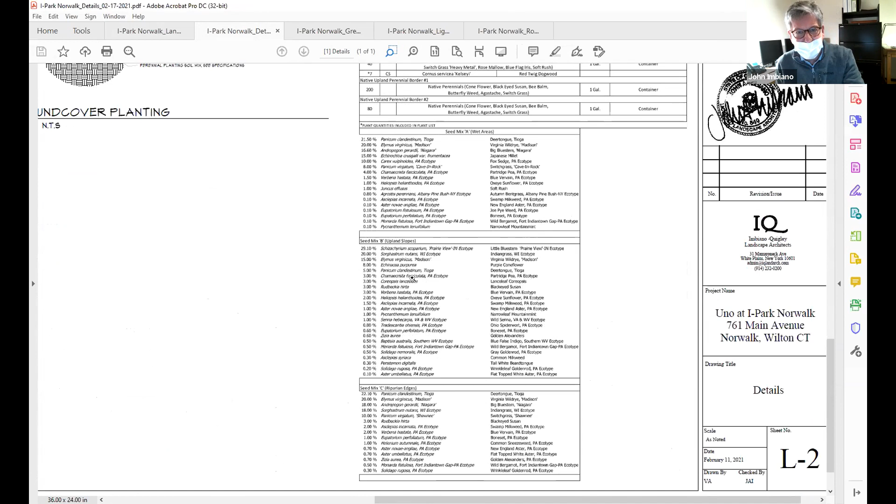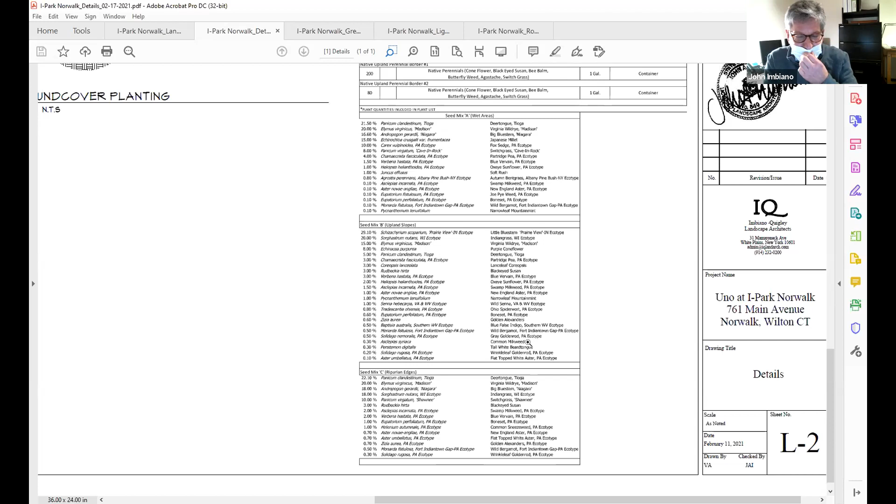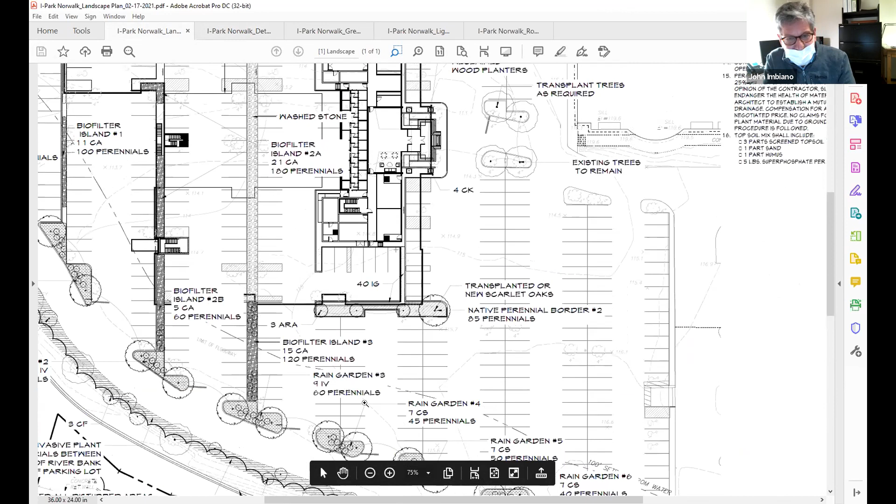I want to add, while we're talking about riparian edges and rain garden mixes and wet tolerant mixes, we also have an upland mix, because right now we don't have a blade of grass on the whole property, which I think is a good thing for enhancing the pollinator aspects, sustainability, and drought tolerance. If we go back to the plan, on the east side of the building in that wide open area, we're introducing an upland meadow. So there really is no lawn in the whole project area. And even going south, though we don't necessarily need a biofilter strip there, we're integrating upland species of perennials to tie together the whole landscape restoration project.

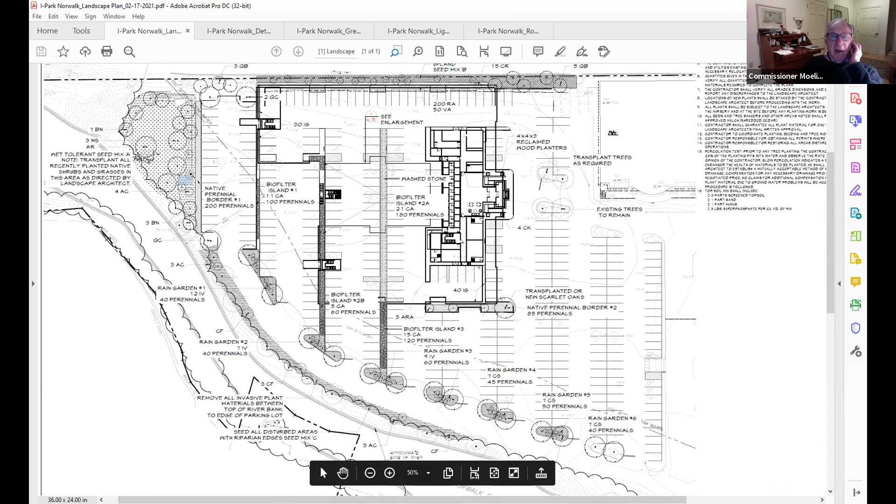Okay, can I review again - Alexis, you're still waiting for information from the city regarding the stormwater management, is that correct?

You're muted, Alexis. That one was for you, Alexis. Did you get that? Yep. No, I'm muting. Yep.

So I'm looking at a February 16th email from Wilbur, the permit engineer, regarding his indication that the city does not allow runoff collected from a parking facility with covered parking to be discharged to the stormwater drainage system. Mr. Chairman, I can respond to that.

From that email, I actually had a phone conversation with Wilbur regarding the regulation and where I could find it to review. We also discussed the sanitary sewer elevation on this site, and that we couldn't discharge our stormwater collection system to the sanitary system because it's much lower in elevation. So Wilbur suggested we write a letter stating that fact, on top of the two primary stormwater treatment systems we've implemented in this design, the biofiltration trenches and rain gardens, and the secondary, the hydrodynamic separator included as secondary treatment for stormwater runoff. Then we could ask for a waiver. This regulation is regulated by DPW and is part of the city ordinance, but I could not find it. I called Wilbur yesterday and today and he hasn't gotten back to me, so I'm waiting patiently to write that letter.

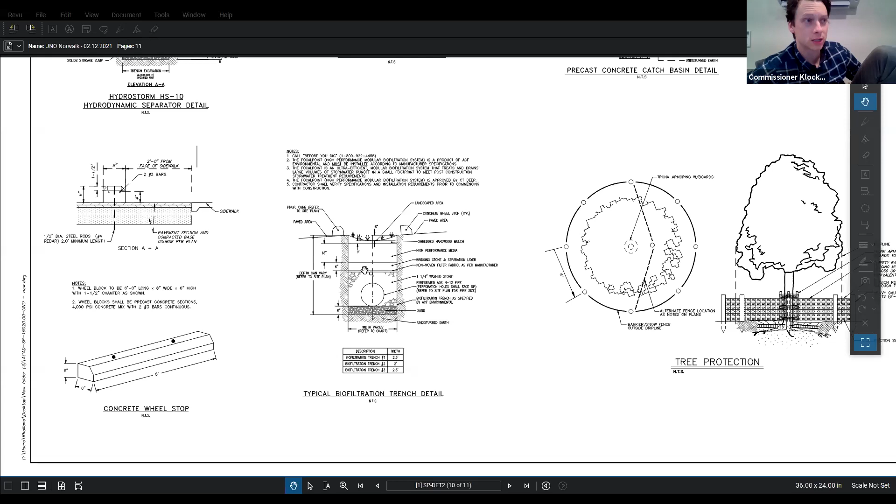Okay, so it's not really infiltrating any water, it's just slowing it down and filtering it before it discharges into this storm sewer that's been addressing the surface water before this point. That's correct. The medium shown is approximately 27 inches, consisting of mulch, high performance media, bridging stone, and separation layer with nonwoven filter fabric, which treats the stormwater for 80% removal of suspended solids and pollutants.

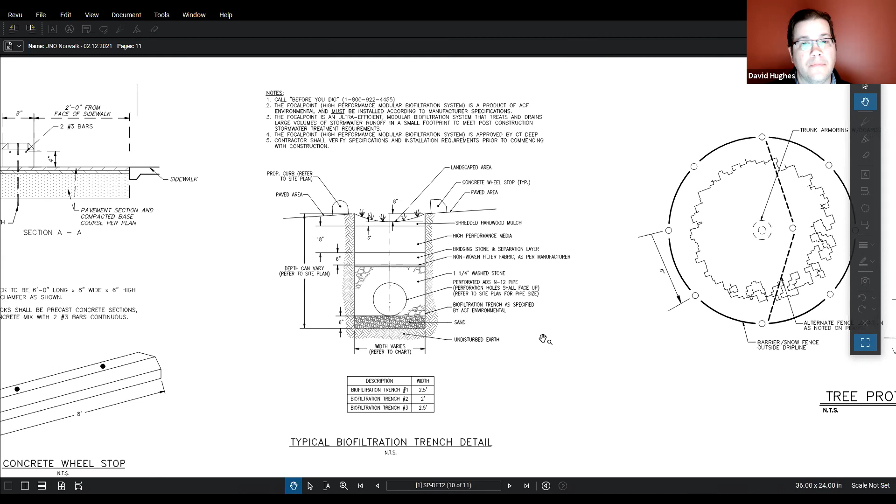And that meets DEEP requirements? Yes, sir, absolutely.

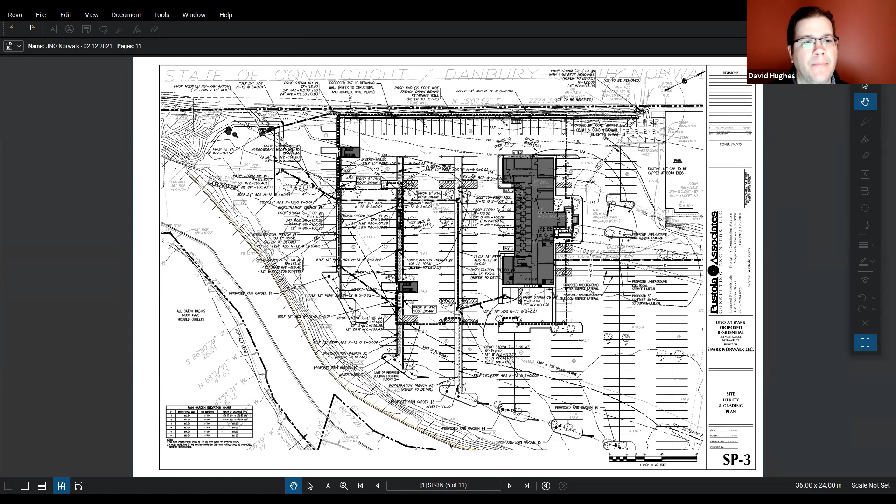And then that slice at the south end of the site, is that just a square footage trade-off because you're in the flood area, or is water being directed there for infiltration? I'm not sure I understand the question, can you repeat? The grassy pollinator area down there, the triangular landscaped area at the south corner of the site, what active purpose does it serve as far as water is concerned? You mean storm water or flood water? Any water, all the above.

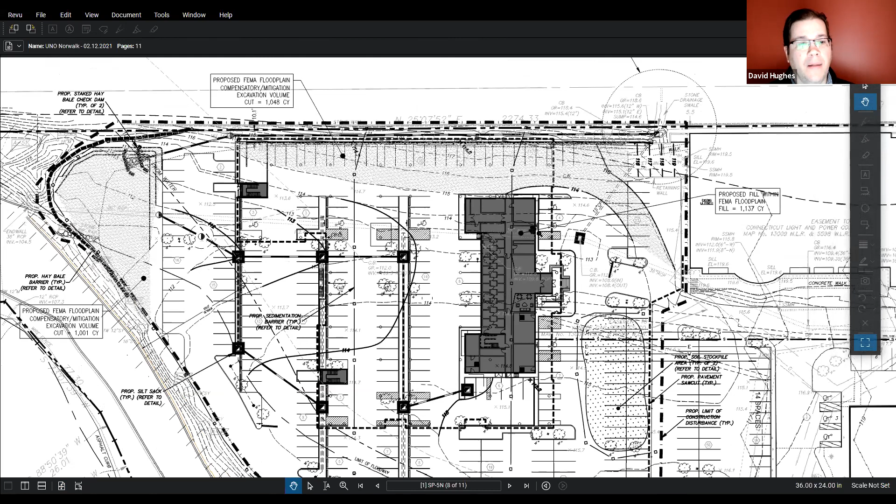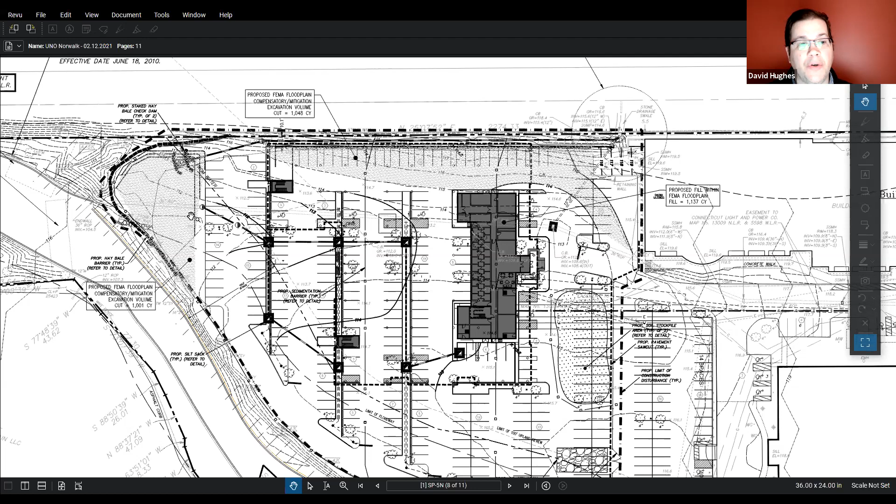Okay, Steve, can you flip to SP5 for a second? You'll see there's a hatch pattern running on the west side of the building and inside the retaining wall, and on the south side, that's the area where we're doing some excavation for our FEMA floodplain compensation. On the south end we are planting it, as John showed you the plantings, and that will also filter the stormwater runoff from that last bit of parking there.

The last bit, like the last row, is there a calculation? Yes, the last row. So what's basically downhill, what doesn't get into your first bio strip to the north, that's correct, basically it's the aisle and two rows of parking, about 50 to 60 feet of pavement, all pitches toward that planted area to the south. And that's designed and calculated to take care of all that water on the hard surface, directing it onto the soft surface where it infiltrates.

Correct. And that's based on what percent rainfall event? They're based on small rainstorms and the first inch of rainfall. First inch of rainfall, okay, water quality volume, got it. Sorry, basically the water quality volume. That's okay, I'm sorry, it's the water quality volume. Okay, Alexis is correct, okay.

And the concern that I have is I want to make sure that the collection under the building is allowed under the city's MS4 permit. The MS4 permit, being a state permit, requires that the city, as maintainer of a stormwater system, meet certain criteria and adopt certain best management practices for stormwater discharges across the city. So Public Works is working on figuring out what those catch basins are that are underneath the building, since they are no longer exposed to natural precipitation.

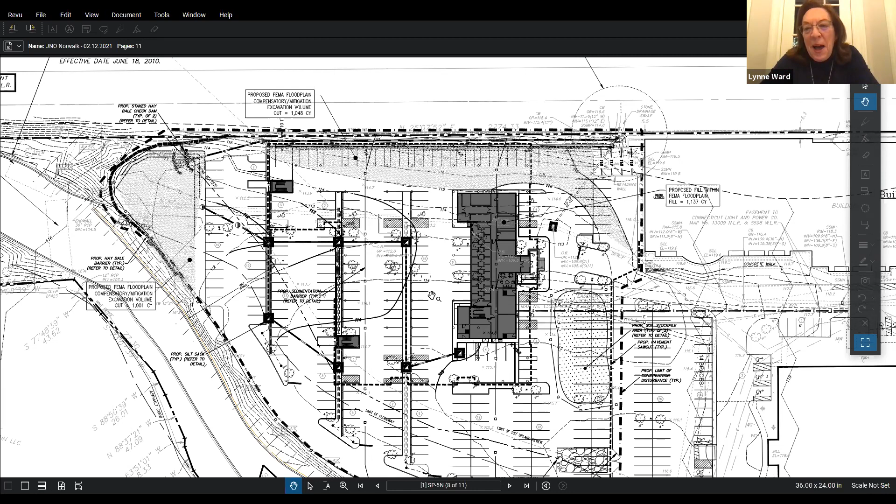So when you have a surface that's not washed during stormwater events, it is different than having a parking lot. And I'm not saying that the existing parking lot is any stormwater treasure by any means. This is the land of opportunity here. So I do understand that.

But on the other hand, you are proposing a significant new building, and we want to make sure that the stormwater improvements are applicable for the areas where they're being proposed.

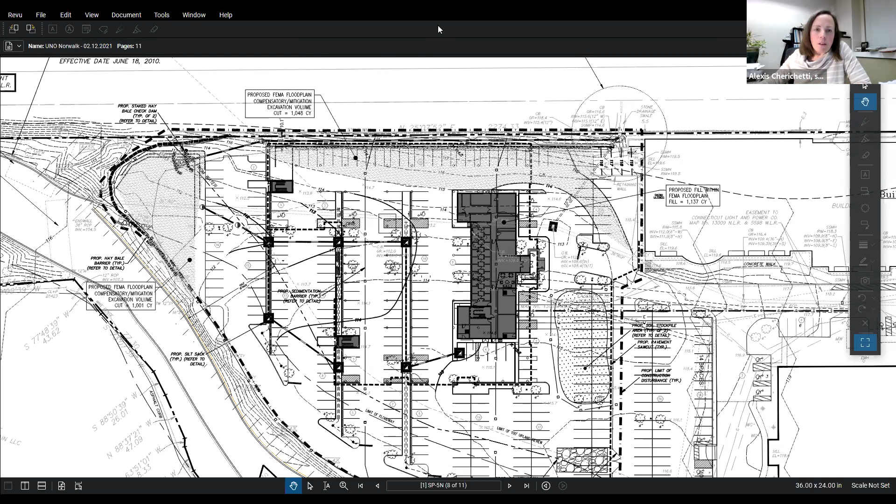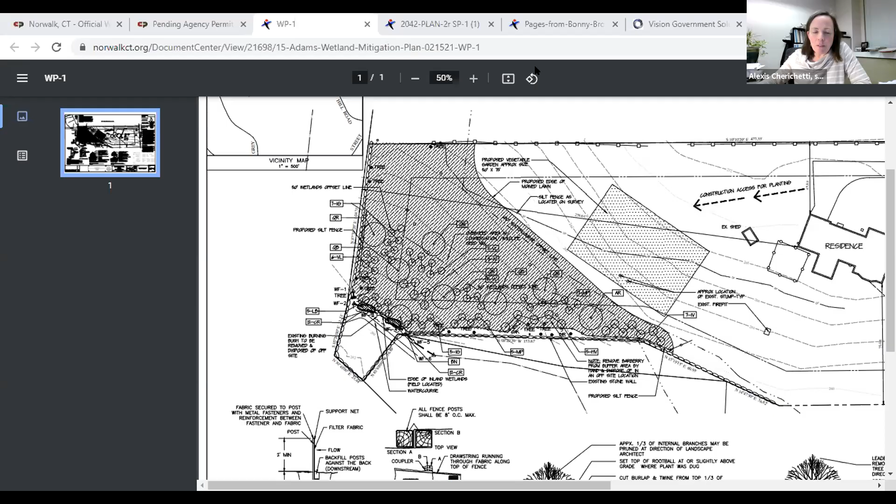So I would just encourage you, especially looking at the site plan, you do have that nice final southern strip of perennials, and then it drops into the basin. And my concern is that will make for a really convenient place to put a bunch of snow.

And the issue with snow is that, in the winter, even with the rain gardens and the bioretention and all the systems in place, when you have snow deposited on the riverbanks or on top of the wetland area, there is no real opportunity for remediation. So it comes with all the detritus and the sand and whatever else gets scraped up.